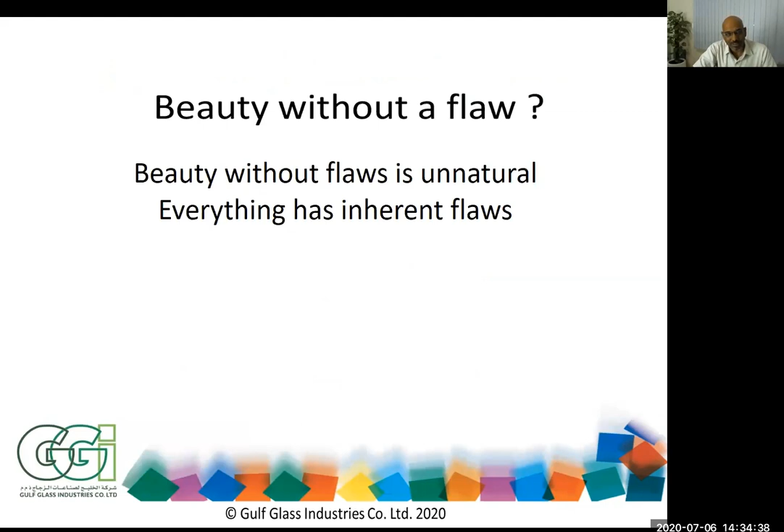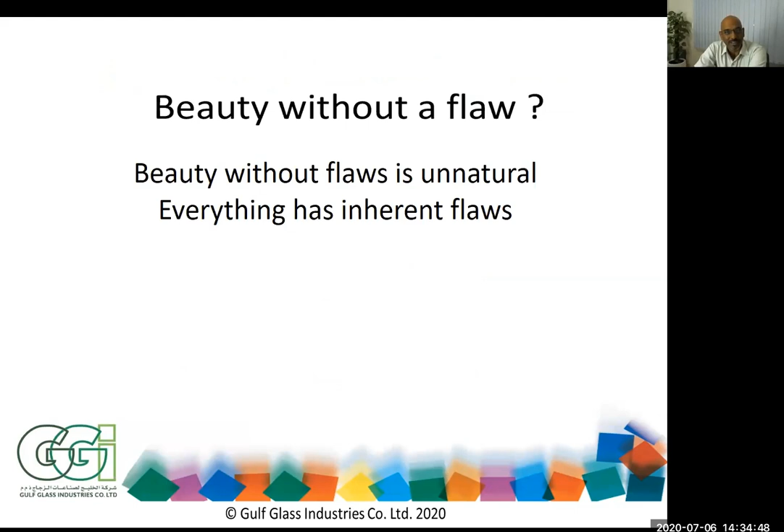So let's see why beauty without a flaw. Before we talk about glass, there are some things we need to know: beauty without a flaw is unnatural. Everything that is beautiful has a flaw in it, and everything has inherent flaws. Glass is not an exception.

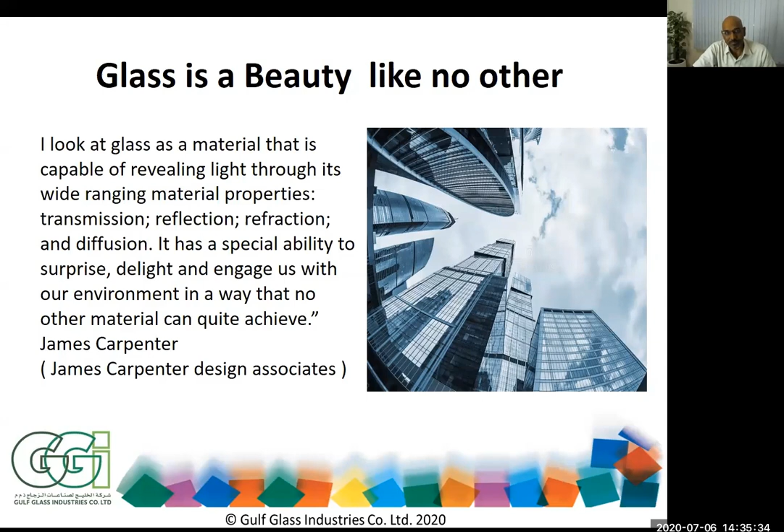Glass is a beauty like no other material. James Carpenter, one of the design associates in the US, has this to say: I look at glass as a material that is capable of revealing light through its wide-ranging material properties: transmission, reflection, refraction, and diffusion. It has a special ability to surprise, delight, and engage us with our environment in a way that no other material can quite achieve. And that is so true about glass. It is a beautiful material like no other material.

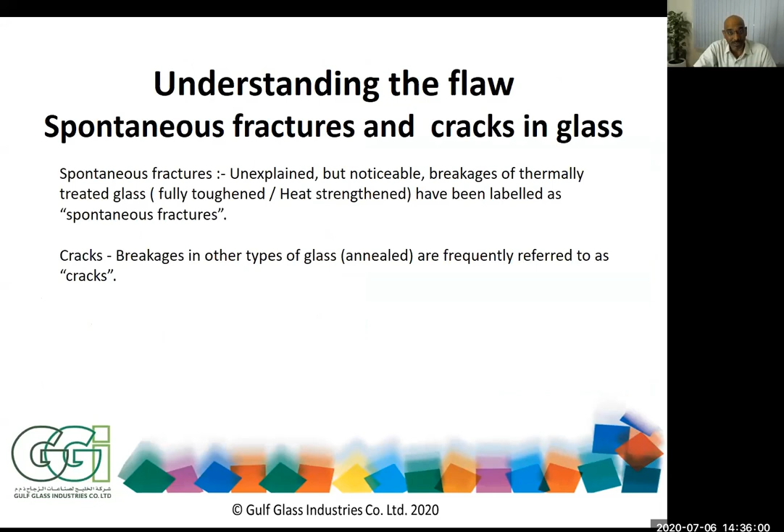So coming to understand what that flaw is in this beautiful material, we need to know the definitions. We hear these terms: spontaneous fracture and cracks in glass. A spontaneous fracture is an unexplained but noticeable breakage of thermally treated glass, in brackets fully toughened or heat strengthened, which have been labeled as spontaneous fractures. On the other hand, cracks are breakages in any other type of glass, such as annealed glass which is not heat treated, and they are referred to as cracks.

But within the industry, we have some misleading definitions and information regarding spontaneous glass fractures or breakages. We say that spontaneous glass breakage is a phenomenon by which glass may spontaneously break without any apparent reason. As glass industry experts, we need to clarify these definitions. Glass will break for a reason, because there is always some reason - it cannot break without any apparent reason.

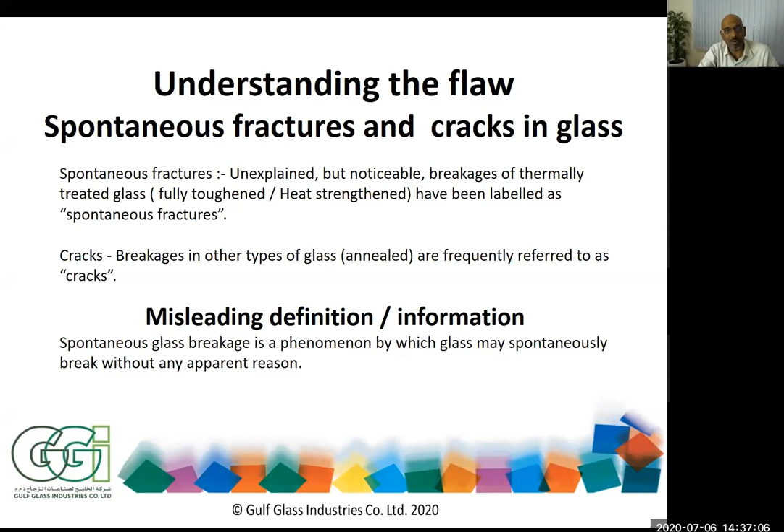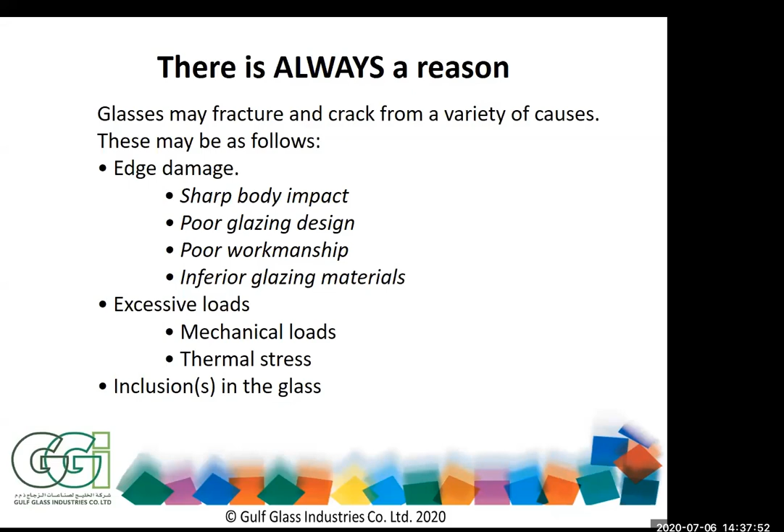Glass may fracture and crack from a variety of causes. These may include edge damage, which can be caused by sharp body impact, poor glazing design, poor workmanship, or inferior glazing materials. Other reasons for breakage include excessive load, mechanical loads, and thermal stress. Last but not least is inclusion in the glass. There's always a reason for glass breakage. Sometimes it is easily diagnosed by looking at it, but sometimes it needs experience and expert opinion to analyze it.

So let's look at where we start. One of the major reasons for glass breakages in our experience - and we have been collecting data as GGI since 2005 - is that most damages, edge damages, are the main reason for spontaneous breakage of glass. Edge damage reduces the strength of the glass by more than 50%, and this increases the likelihood of breakage due to mechanical or thermal stress. These edge damages can happen during manufacture, that is processing, transportation, installation, and service conditions.

When we went there, we found glasses which were broken. When we did an investigation, we only saw edge damages, and through this edge damage the glasses were propagating cracks leading to breakages. It was happening only on one side of the elevation because that elevation was getting most of the temperature, sunlight, and wind. Along with that, the pillowing effect of the glass in the IGU, which keeps on moving like the unit is breathing, causes cracks to penetrate into the tension zone, which we'll look into later.

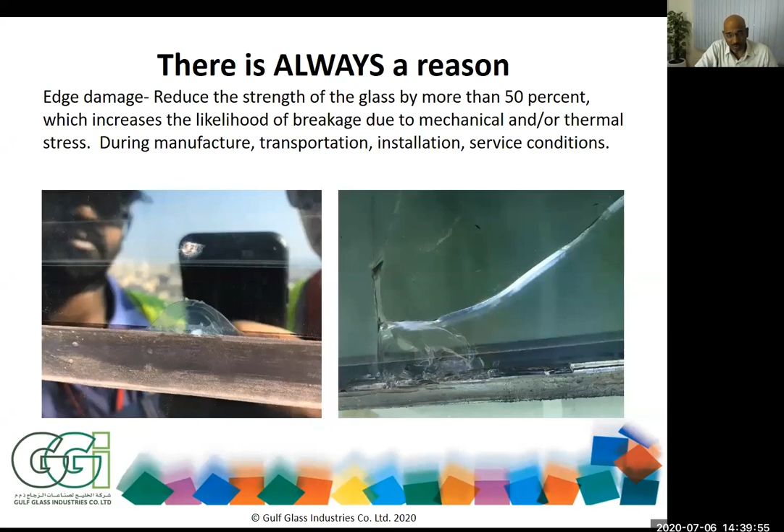This job was nearly 20,000 square meters of heat strengthened glass, and we had a lot of breakages on the heat strengthened glass. But the inner layer, tempered glass, which was another 20,000 square meters, had no spontaneous breakage on this building. So that shows us edge damage is one of the key reasons we find breakages.

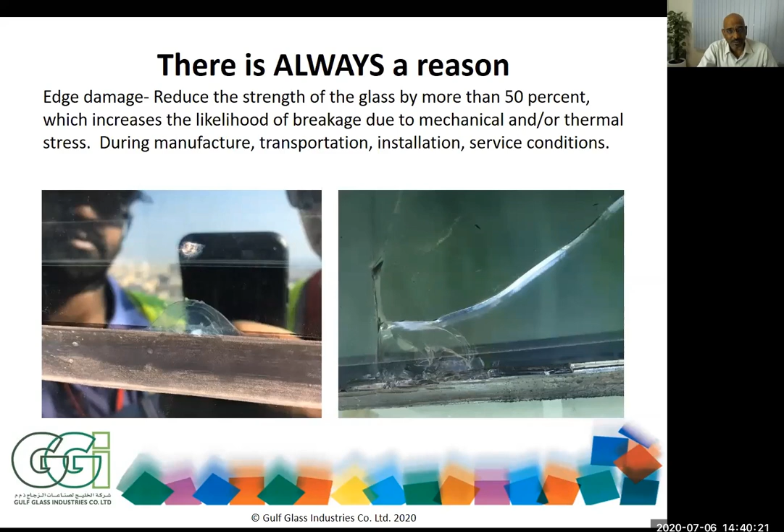There's always a reason, as I said, edge damage. There's a hard impact or sharp impact, which can happen during installation and service conditions. One thing we've always seen causing spontaneous breakage nowadays is that glasses are being used as balustrades - single monolithic glasses as balustrades. It's elegant and beautiful because people use glass as a beautiful material, so there are no cover caps or handrails - what we call exposed edge or frameless glass balustrades.

But there is a concern because when using these glasses, there's always a possibility that edges can get damaged. Rightfully, the UAE Fire and Life Safety Code 2018 is one of the few codes that have made it mandatory, at least in the UAE, that balustrade glasses have to be laminated because it is a barrier. If that barrier breaks, there's quite a possibility of injury or even death if a person falls off.

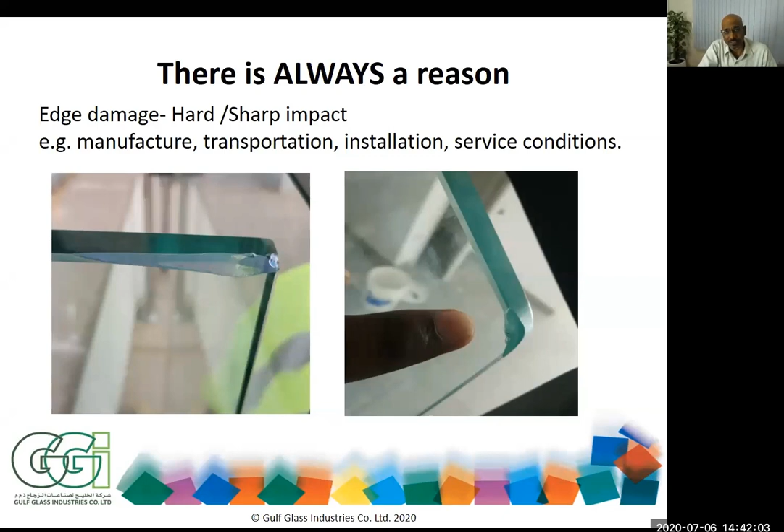So these are some of the things. Yet we see a lot of people using single monolithic, be it 19mm or 12mm glasses, as balustrades in their buildings. But it has to be looked at very closely by designers, architects and consultants.

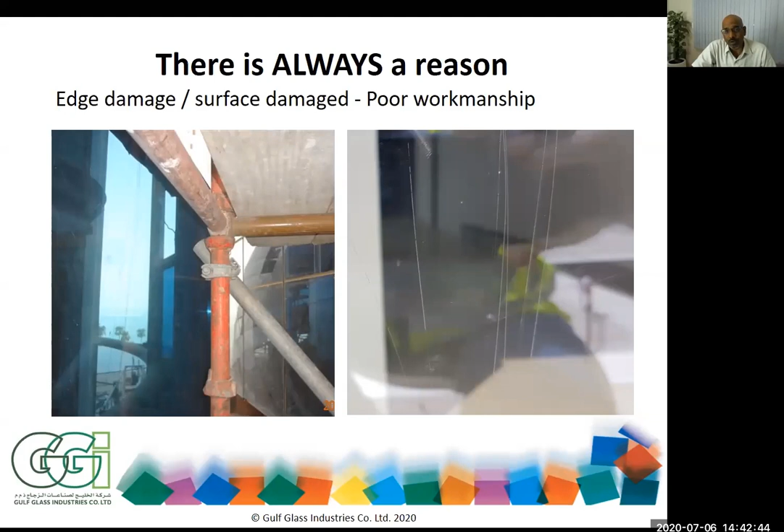This is the way we see things on site. These are some examples of people using metallic scrapers to clean glasses. The other concern we've experienced is concrete slurry and construction materials that fall on the glass surface, and these are not protected. This creates surface damage.

This surface damage - in 2006 we completed a job of nearly 30,000 square meters, and by the time the building was ready for handover, we had 400 units of heat strengthened glass broken spontaneously.

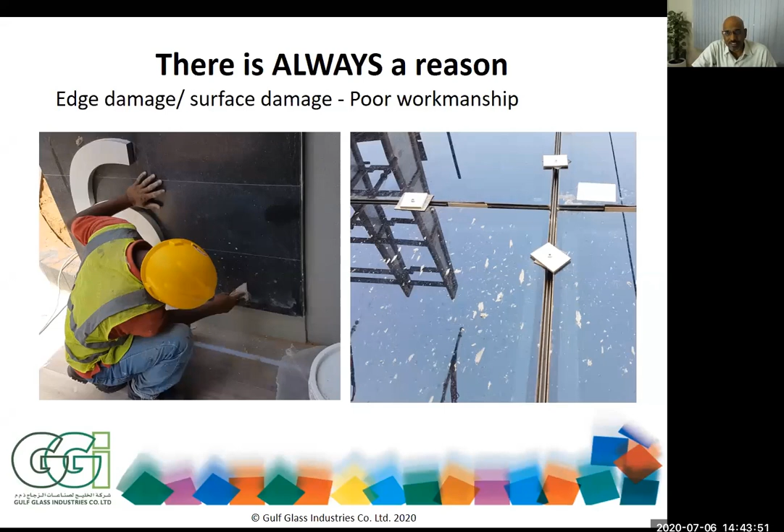When we were called for investigation, we investigated the whole building and found surface damages - there was something like this. This surface damage, under a microscope at nearly 10 times magnification, you can actually see a spot, you can see the surface being damaged. From this point, the glass would crack.

When we investigated further, we understood that after the glazing was done on this 30,000 square meter building, on the top floor they were doing concrete work, and the glass was taking in this concrete - it was falling onto the surface of the stone and concrete, everything coming down with high velocity and hitting the glass, creating these cracks.

Not instant glass breakages, but after a few months, and this was during the summer month in the Middle East. It gets too hot, and we had 400 units of breakage just because of surface damage. So this is another reason where surface damage causes glass breakage.

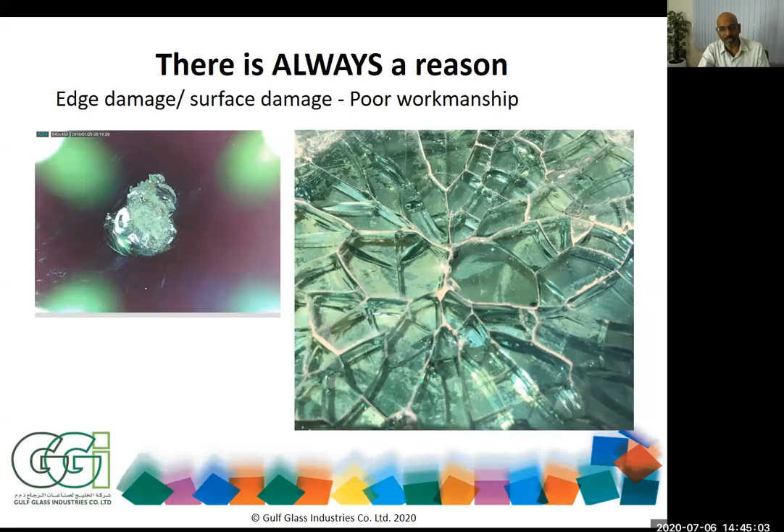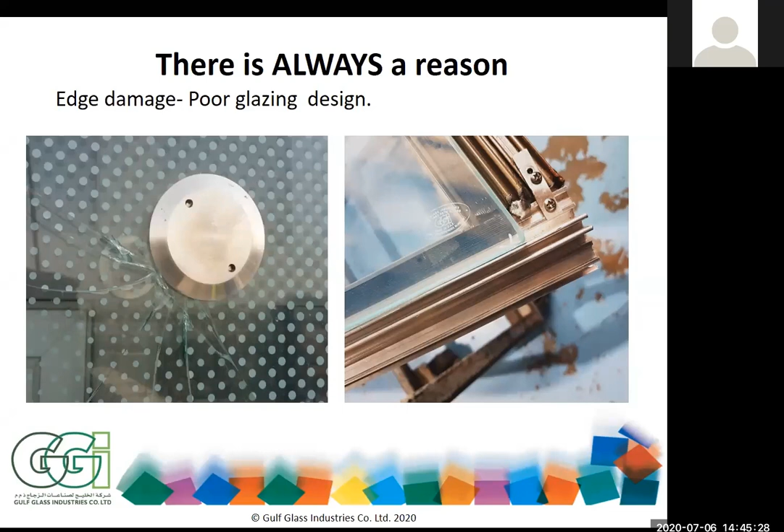This glass was installed, and within a year we had glass breakages seen on this building. When we investigated, when we opened the spider fittings, there was no separation material, there was a metal to glass contact. The other picture you see is where there is contact between the glass and the metal.

Designers today are probably taking that extra effort to keep a clearance and use setting blocks of the right hardness. But probably on fabrication and on site installation, this has to be looked at, because we are seeing an increase of such breakages for the past 3 to 4 years, where we are seeing a metal to glass contact.

And everybody is saying the glass is broken without any reason. It is spontaneous breakage. It is not. There is a reason for it, because these guidelines have not been followed.

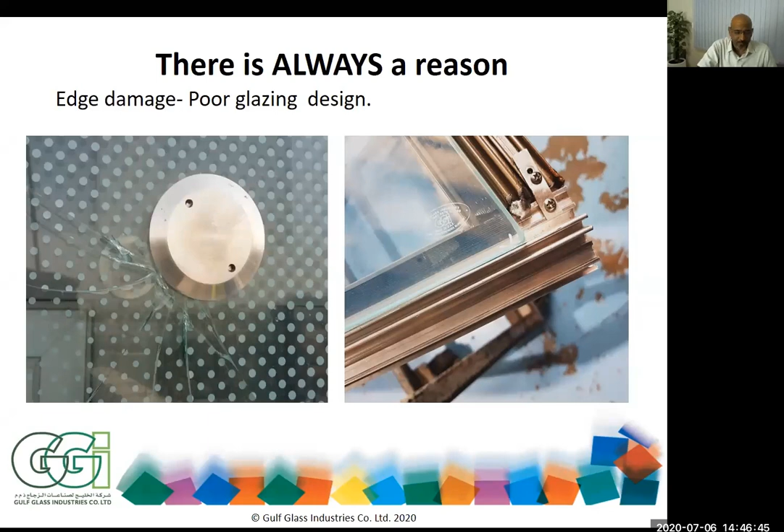A very good handbook is the GANA glazing guidelines and the GGF glazing guidelines, which can be seen on the public domain. You can visit sites and find a lot about setting blocks, about edge clearances between glass and metal. Coming back to the other reason, there's always a reason, an inferior glazing material. As I said, exposed edge glazing, frameless - nobody wants to see metal around the glass.

So people have started using grouts. The cement grouts that have been used for a long time, but they have compatibility issues. So people have started using epoxy grout.

Now, having known that, we had two instances where we saw glass breakage, spontaneous breakage. We had a high wind load condition where it broke nearly 40 units within 3 days, balustrade glasses. And we were called and told the glass is breaking, spontaneous tempered glass breakage, broken without any apparent reason. That's what the customers always tend to say.

During investigation, we found out that the grout material being used was too stiff, and the hardness did not allow the glass to move in that pocket. It was not able to breathe inside that. The coefficient of expansion between glass, metal and grout needs to be considered. Glass has to have some expansion, because building movement and material movement will create such breakages.

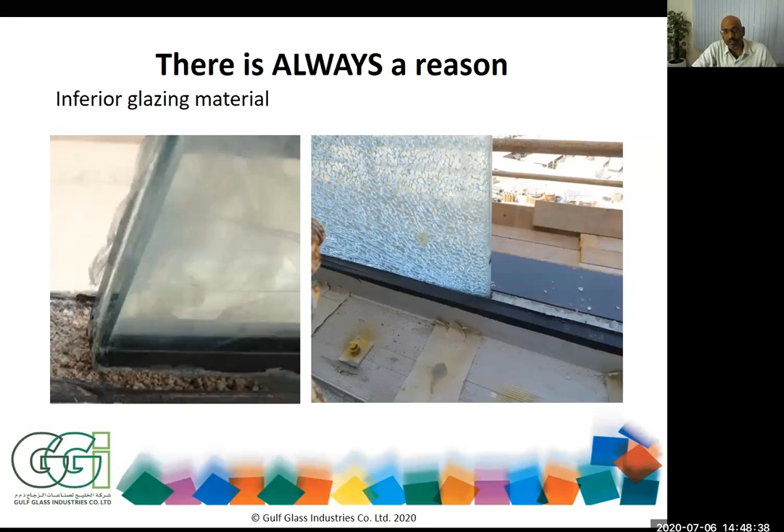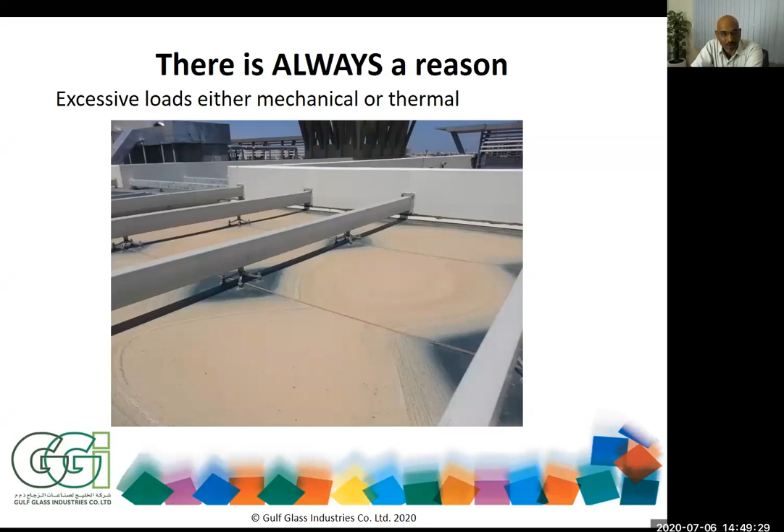This was a condition where there was water and continuous load on the glass, with all this dust and sand that was on the glass. So it was a constant load on the glass. So these need to be checked - how close the designs of having holes around the corners should be, and will it be able to take those loads, the maintenance loads and then the service loads.

This is the glass, how it looked from below. And we had breakages, and they were all originating from the rotule joints. So this is some of the things that we have seen, and we are sharing the experiences so that we understand that just because people say spontaneous breakage is a glass problem, I believe it is more than that.

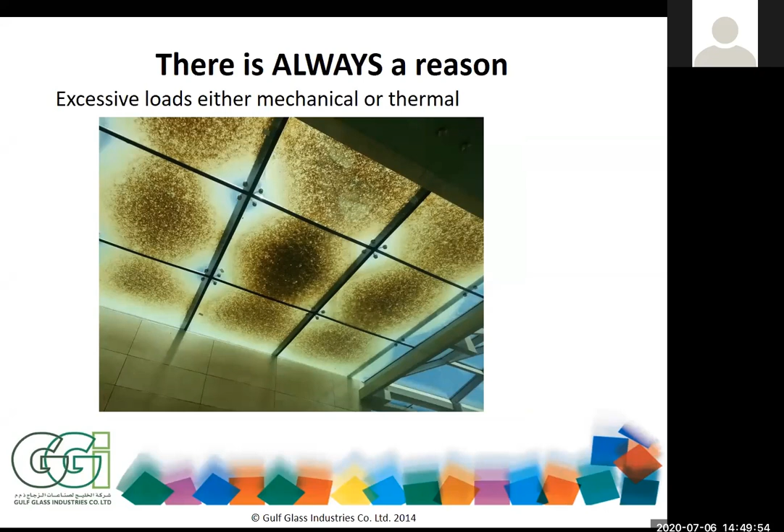There's always a reason, and thermal stress in one in a million annealed float glass is one of the reasons. The pictures you see are courtesy of Vitro, formerly PPG. They have a very good presentation on this, and I have taken some of it. The breakages you see in annealed glass is one of the reasons people are shying away, or designers are not using annealed glass, because they fear thermal stress breakage, likely due to edge damage and the thermal gradient that can happen in annealed glass.

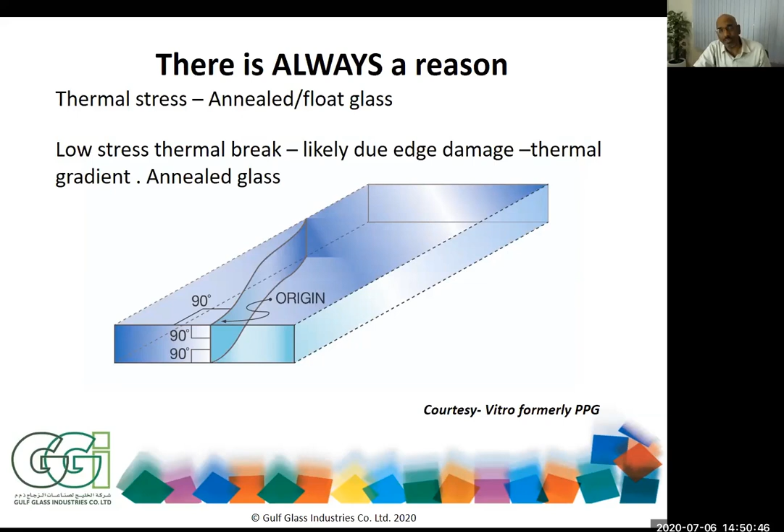You can look at the glass and find out whether it is a low stress thermal break, because the origin will start from the edge of the glass and it will only have probably one crack along the glass. So this is how it looks.

But having said that, this is the high stress thermal break. And this can happen due only to thermal variation, thermal gradients that can happen. Many times, what happens to the glass is the edge of the glass, which is in the heavy framing, cools and remains cool, while the center of the glass is heated up because of the sun's exposure. And there's a temperature difference.

In service conditions, what we have seen is any temperature difference between the edge and the center of the glass, about 40 degrees centigrade, can create such high stress breakages. You don't have to do thermal stress analysis on tempered glass or heat strengthened glass, because tempered and heat strengthened glass can take a temperature difference between the edge to the center of approximately 250 degrees centigrade, which is never going to happen on a building.

Having said that, we have seen annealed glass. We have used in two projects nearly 60,000 square meters of annealed laminated glasses. It's been nearly 10 years that the project is in service, and we do not have any thermal stress breakages. The outer glass, to be precise, was a heat strengthened glass, high performance, double silver glass. So if the thermal stress analysis has been done correctly, you can use annealed glass on buildings. This is used in the Middle East, and it is perfectly okay.

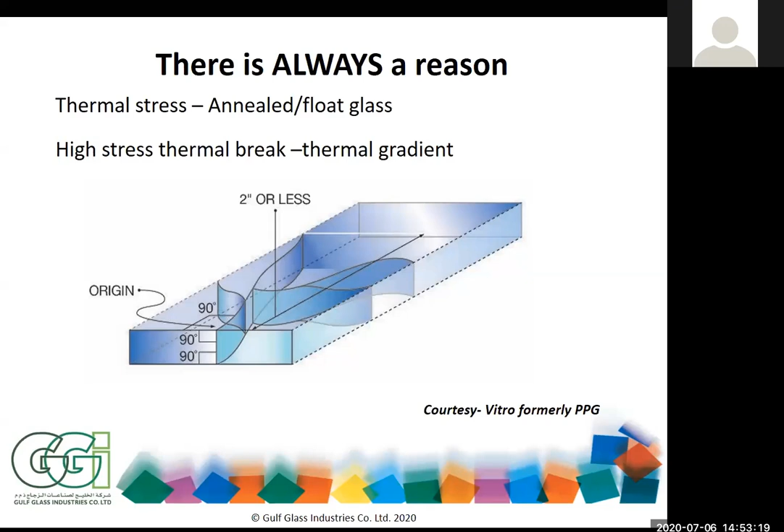There's always a reason, and we will come to the inclusion in glasses. Inclusion in glasses is a very hot topic, and I have taken much of this from PPG, Saint Gobain, Vitro and Saint Gobain glass. Any undesirable material embedded in glass is considered as an inclusion. Glass has many inclusions, shapes and sizes, and the distribution density is given.

You have international standards such as ASTM C 1036 and EN 572, you can have a look at it. There are inclusions which are allowed in the glass of 0.3 mm, even up to 0.5 mm. Having said that, any inclusion or bubble greater than 500 microns, 99.9% is detected by the online inspection and then removed off the float glass production.

The issue is nickel sulfide inclusion greater than 50 microns can create special problems. Detecting such inclusions is difficult on the line. No matter what people say, having detectors on the line, you cannot detect such small inclusions very easily. So elimination approach is better.

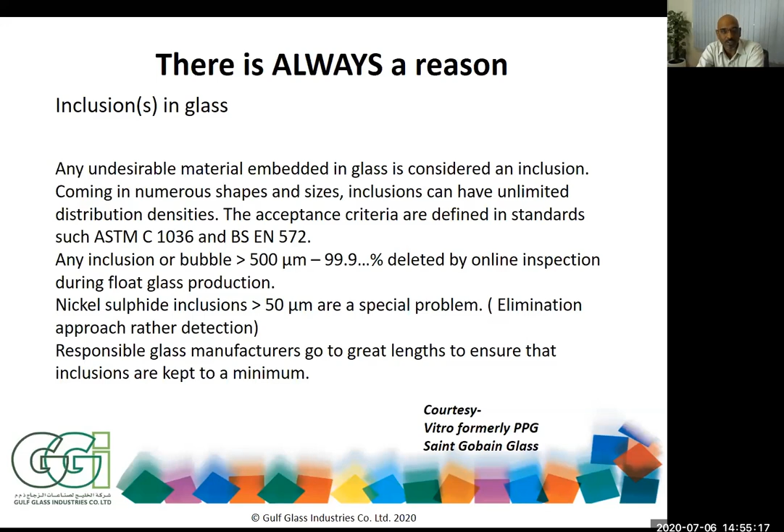Butterfly pattern or 8 shape. Many people in the industry look at the glass and say, wow, that's a butterfly pattern, that's an 8 shape, and eureka, they have found it, oh this is spontaneous breakage, this is nickel sulfide breakage. That is not the right approach. Everything that has a butterfly pattern does not indicate that it is an inclusion breakage or nickel sulfide breakage, because glass can break due to load, concentrated load, in the same way.

This glass, which is taken from Saint Gobain articles, is from our own experiments and exercises, and when we see that the glass is concentrate loaded and broken, you will have a butterfly pattern. So even a soft body impact, even EN 12600, if anybody is doing that, breaking the glass by EN 12600 or ANSI Z97, you will see a butterfly pattern on the laminated glass of a tempered or even a heat strengthened glass. It shows you an 8 pattern.

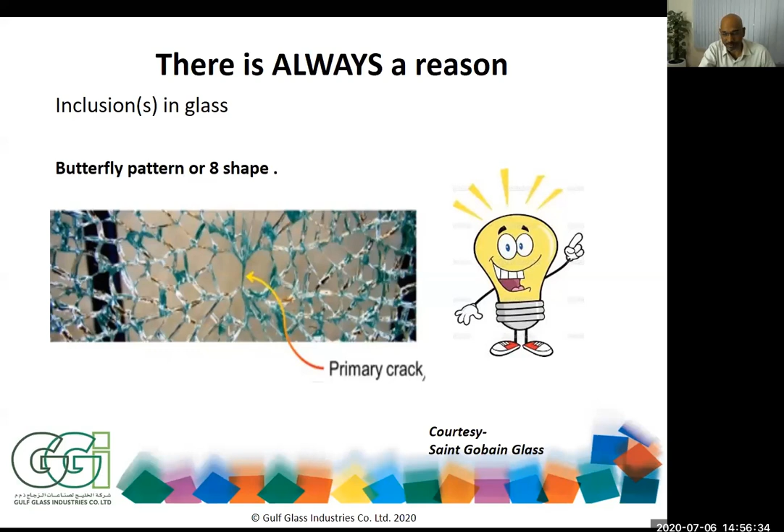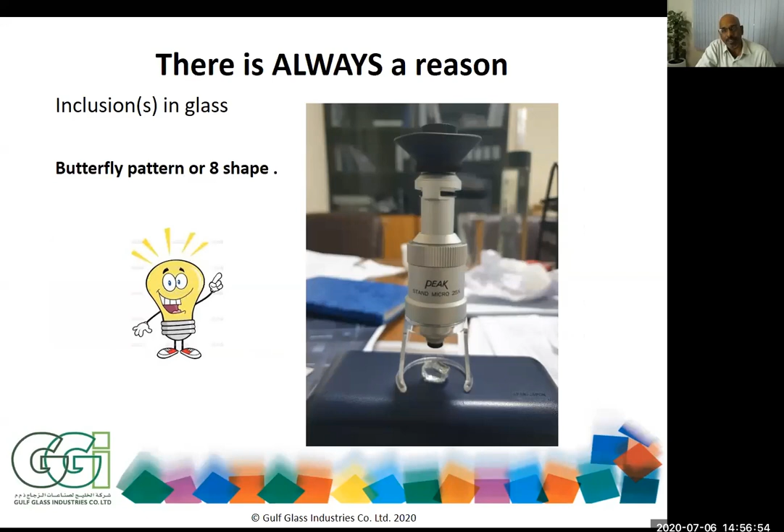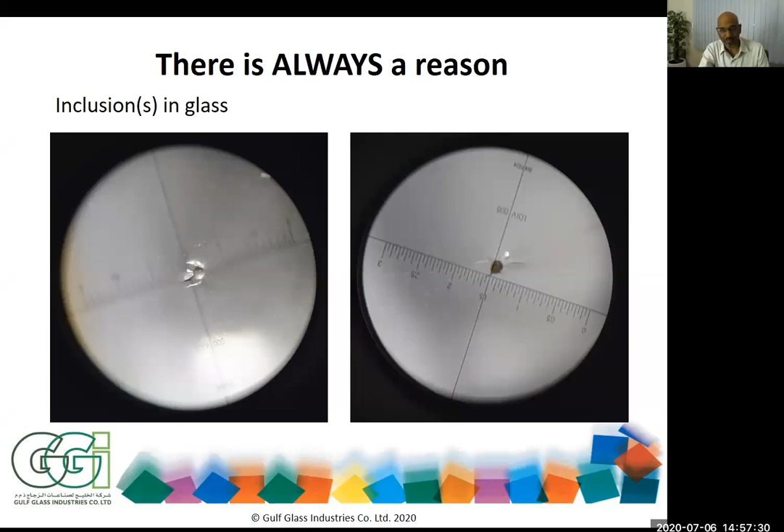At GGI, we do not say that it is an inclusion and we do not comment on it. We say it is a possibility that it could be a nickel sulfide inclusion, but we are not sure. How can we be sure? By doing an analysis, a laboratory testing, to conclude the characteristics of the inclusion. So SEM analysis has to be done, in a laboratory, and EDS, which pinpoints the analysis.

Nickel sulfide inclusion breakages are not new. The first one to acknowledge nickel sulfide inclusion as a problem was PPG in the 1940s.

In 1961, there was a paper published, Fracture of Toughened Glass Wall Claddings, in respect to what happened in Australia.

In 1981, a Journal of Material Science paper by M.V. Swain, and then Dr. Andreas Kasper of St. Gobain, along with other glass manufacturers, have done quite good work in understanding and providing solutions on how to minimize the occurrence of spontaneous breakage due to nickel sulfide.

The last development that has happened is EN 14179 2018, which is the latest development in terms of holding temperatures and ensuring that the heat soaking is done properly. So it is not something new.